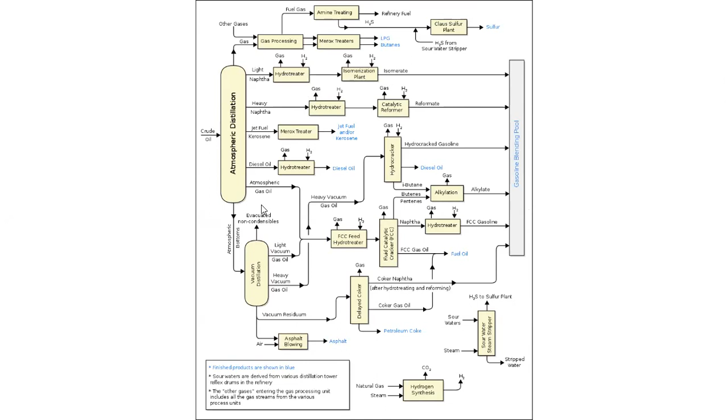Catalytic reformer - we will talk about the catalytic reformer, what is the function. And there is hydrotreater - is it hydrotreater? There will be one more function where you will have removing the sulfur, right? Removing sulfur is one of the things - desulfurization process. And finally you have alkylation, then you will go to the gas oil. This is the general overall flow chart of what is happening in your petroleum refinery. It has come from crude oil to the lighter one, refining process.

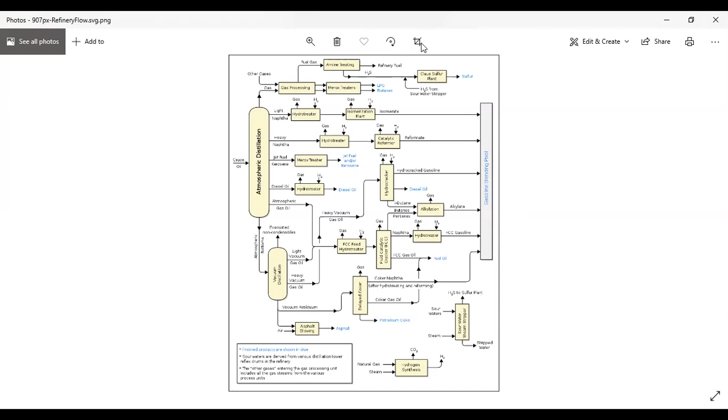I will send you this chart, you can go through that. And whether you will have a question on this or not, we will also see some sample questions - it's all repeatable questions. So you can prepare for that, or if you have already some material, please prepare for that also. Come back to the distillation tower.

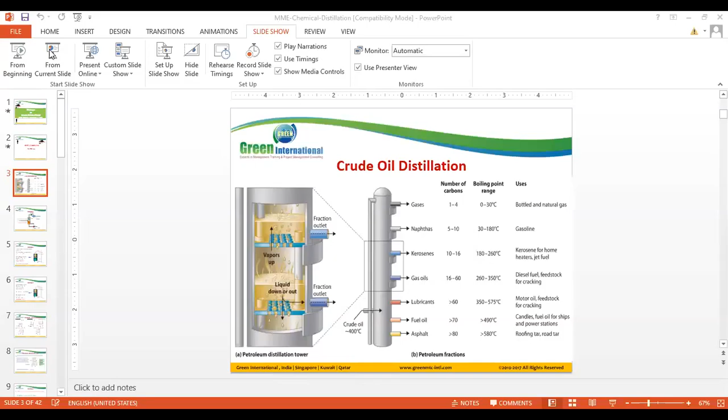Our feed, right? There are two sections generally, rectification and stripping. So rectification means whatever the lighter one will go, then they put in a condenser, have a reflux drum, then the distillate will be removed. Then the reflux will be fed back to the distillation column.

Similarly, stripping means you have a heavier one, which they put in a reboiler. Then whatever the boil-up, that will be fed up into the distillation column. Then you will get a bottom. This is a distillation tower process. You have two sections. One is rectification, another one is the stripping section. This is the reflux area, and this is the reboiling section.

So Madam, can you go back to your last slide? This one. Yeah. Why are we calling the above section rectification? Any reason? Why? Because here it is not only feed. I think whatever lighter gas in the boil-up, right? This is also further removed. Same way for stripping also.

Why is it called stripping? Removing the heavier one, like a liquid, they say vacuum distillate. That heavier one, like tar or asphalt, all are removed. So that will be stripped out. Here we are rectifying the lighter one, the gas. That's why this portion is called rectifying. This is called stripping. That's because of that. Okay.

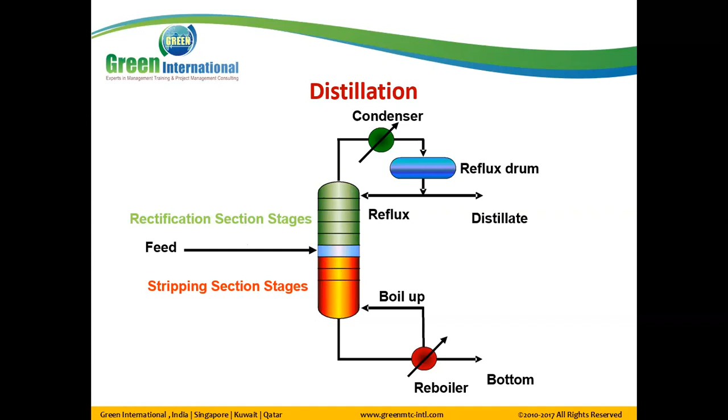All right. So again, we are taking the mass balance here because, as I told you, we are going to calculate the percentage of composition only. So for the feed, the major mass balance is F equal to D plus B. Then if I take one component in the feed, whatever component is in D, whatever component is in B, that's what will happen. Same way for your rectification section. This is your rectification section.

So here it is V bar. What is V bar? V bar will be the boil-up, whatever boil-up is coming in and going up, plus from the feed also the lighter one, because the distillation column will be maintained at atmospheric pressure and temperature. So it depends upon the temperature and the condition. So the boil-up and the feed will go here. That's why it is V bar. They're not calling it the same V.

So V bar is nothing but L, the liquid, which after condensation will be poured back to the distillation column, plus D. That's the rectification mass balance. Similarly for a component, if you take X, X in V bar is nothing but XL·L plus XD·D. Here they can calculate the reflux ratio, because this process is called reflux. Reflux ratio R is equal to L by D. That's called the reflux ratio.

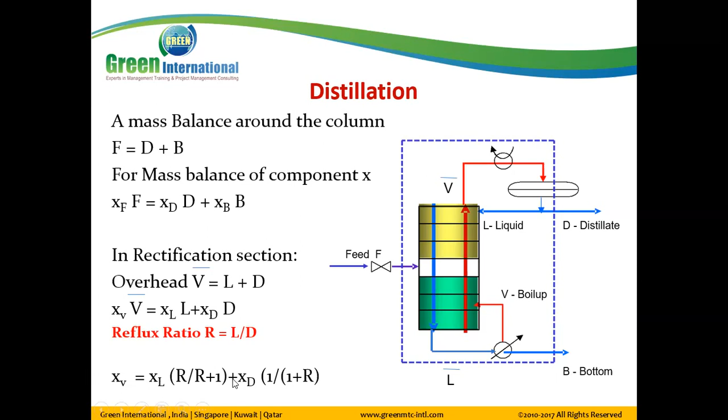So the mass balance can be written in terms of reflux ratio also. That means XV equal to XL into R by R plus 1, plus XD into 1 by R plus 1. Please remember this formula and the reflux ratio formula, because sometimes they'll give you the reflux ratio, then they may ask you to calculate some composition. So that is what you can calculate: XV, XL, XD. Same thing we saw here.

Now come back to the stripping section. The mass balance is L bar equal to V plus B. Here, L bar is V plus B. Same here, there is a boil-up ratio. Boil-up ratio means V by B. L by D is your reflux ratio.

Now, when we talk about the V bar, V bar is nothing but some coming from the feed and some coming from B. Put together, it's called V bar, right? But that depends upon the condition.

The liquid condition. So if the feed is a subcooled liquid, then L bar is greater than F plus L. There will be more condensation, more liquid formation in the distillation column. That's why they said L bar greater than F plus L, where L comes from the condensate, which is reflux from the rectification section.

If it is a bubble point, right? Bubble point means it started to slightly evaporate. So at bubble point, you have a V bar which has come from the reboiler. We can see even in the V bar, some liquid is getting condensed also. So in a bubble point condition, V equals V bar. Feed is completely liquid, L is also completely liquid. There is no feed vapor coming; from the reboiler in the stripping section, no extra vapor, so V equals V bar.

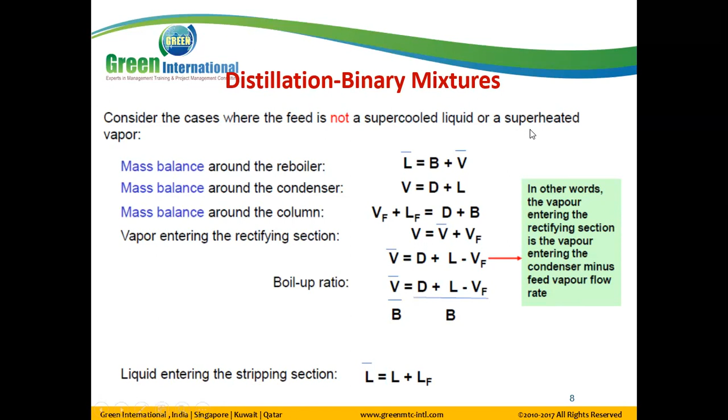And number of theoretical plates. This is given for your information, but so far in the exam, especially in the UPD exam, number of theoretical plates is not being asked. So just remember the formula, if at all it is being asked. See, mole fraction of more volatile component in the overhead and in the bottom, then this is the relative volatility. So they have to give you the relative volatility if they want to ask the number of theoretical plates.

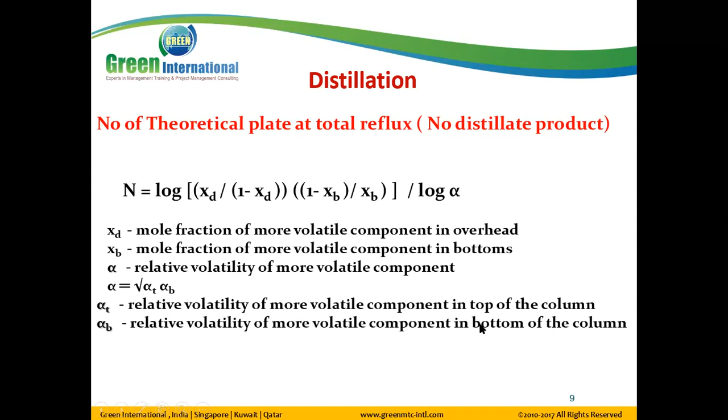Then you have alpha t, alpha b. Alpha t means volatile component in the top of the column. Volatility in the top of the column, volatility in the bottom of the column. This is a little bit going into the distillation process. There are some key, important things I'm explaining, because distillation itself is a big subject. Even petroleum refinery engineering is a separate 4-year engineering degree, right?

Okay. So there is one thing called K factor or characterization factor. What does it mean? Whatever the oil, they are giving it a grade, classifying it based on its paraffinic, naphthenic, intermediate or aromatic nature. K factor or characterization factor is a systematic way of classifying a crude oil according to its paraffinic, naphthenic, intermediate or aromatic nature. If the K factor is 12.5 or higher, it indicates the crude oil is predominantly paraffinic. 10 and lower means it's predominantly aromatic. This K factor is also referred to as the UOP factor or UOP K factor.

Why is this K factor important? If you are in oil trading, we are in the Middle East, country to country, because of the location or source, the oil grade is being given. If you check some kind of business magazine with different country oil prices, you can see they have put in one column the K factor. What does this K factor say? The paraffinic and aromatic nature. So normally 12.5 or higher is paraffinic and 10 or lower is aromatic.

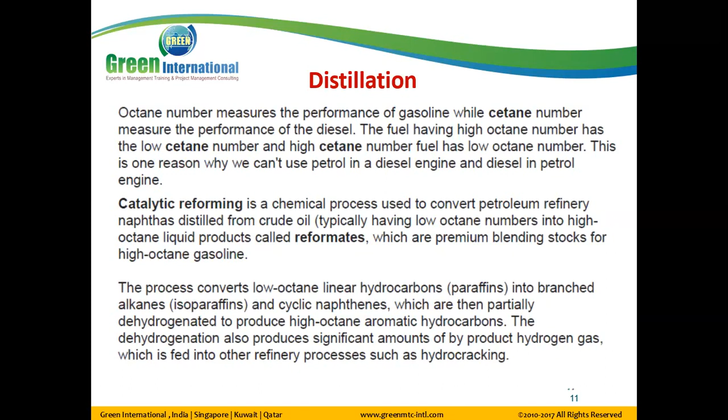That means normally in catalytic reforming, a partially dehydrogenated high octane aromatic hydrocarbon will be produced. This dehydrogenation also produces some hydrogen gas as a byproduct that will be used in hydrocracking. Hydrocracking means converting into lighter hydrocarbons. So this is the basic theory.

I have given whatever information I got. These types of questions are being asked. Anyhow, you can also find a lot of material available, but whatever material I have, I will send it to you regarding distillation. There are a lot of questions, mostly theoretical questions, like what catalyst, something like that. I will share that also with you. Please practice before the exam. Now we go for the distillation question.

A binary mixture of tetrahydrofuran and isopropyl alcohol is to be separated into relatively pure streams of THF and IPA. This mixture of THF and IPA we need to separate in a distillation column, which is operating at atmospheric pressure. The column material balance is summarized in the table below. For the stripping section, the L/V ratio is given as 1.4.

Vapor leaving the reboiler has a flow rate. What is the vapor flow rate in the reboiler? From the material balance, this is a repeated question in the exam, the EPD exam. The material balance is given and L/V is given, asking the vapor leaving the kettle reboiler. We have to do the balance actually, right?

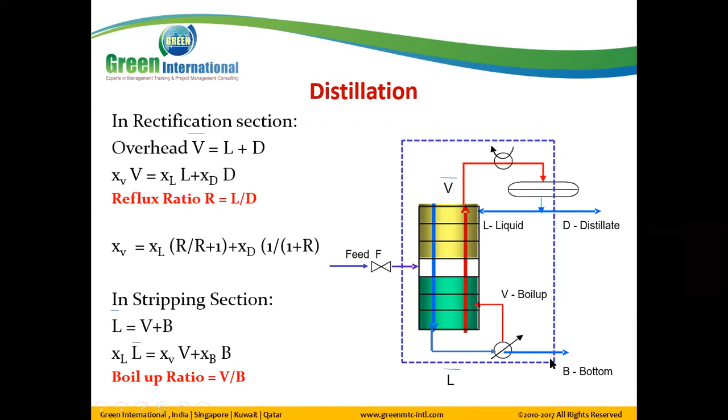In the reboiler section, L equals V plus B. How do we know? From the mass balance in the reboiler section, L = V + B. Then just divide the equation by V, because they have not given the boil-up directly, they have given L/V. So you convert the equation to L/V = 1 + B/V. B is the bottoms, V is the vapor.

So take the bottoms flow rate as 1.259 total, and B/V is given as 0.4. So V is 1.259 divided by 0.4. Can somebody check whether the answer is right? 1.259 is the bottoms total stream in lb-mole per hour, the molar flow rate is given. So divide by 0.4. The question seems big and they have given a table and everything, don't get confused, right?

They are talking about the kettle reboiler section. Take a mass balance and check the molar flow rates given: feed flow rate and feed composition, distillate flow rate and distillate composition, same way for bottoms. Here the L/V value is given as 1.4, so 1.4 minus 1 becomes 0.4. Then B/V equals 0.4, so V equals B divided by 0.4. So 1.259 divided by 0.4 should give 3.15.

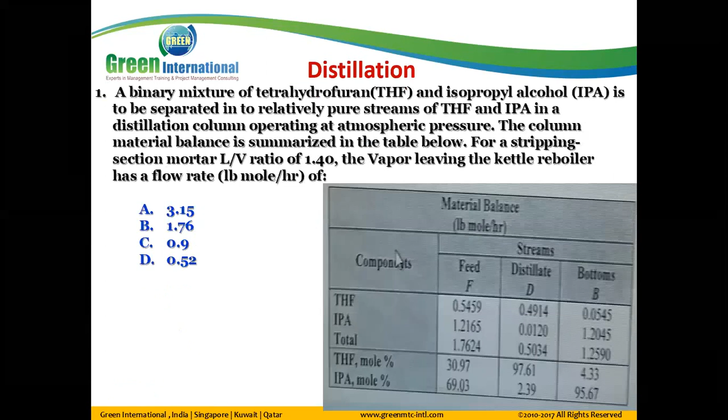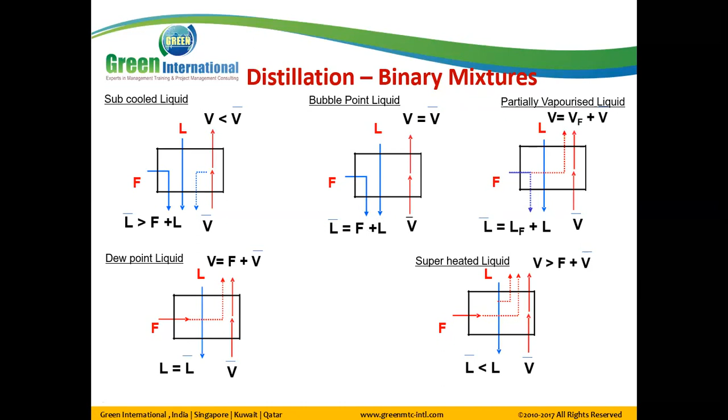Not even a reflux, you mean? Yeah, no reflux. They are only talking about the stripping column. The distillation column can be used only for stripping, right? So that is the stripping column they're talking about. Here it's a trayed stripping column. So if we are saying stripping column, then we should assume there is no reflux.

Exactly. If it is a normal atmospheric distillation, there will be a reflux and a rectification section which has the reflux, and we have a bottom reboiler section, right? But here the distillation is only stripping. So there is no reflux section here. Whatever liquid is coming is only from the feed. That's why L equal to 0.

When L equals 0, then L bar equals F only. So with L bar equal to F, you can write it in mole fractions: X_F F equals X_V V plus X_B B, right? Then you divide it by B. Why do I have to divide by B? Because I need to calculate V by B. So I need a relation between F by B and V by B. Only then can I calculate, right? For that purpose, we divide by B.

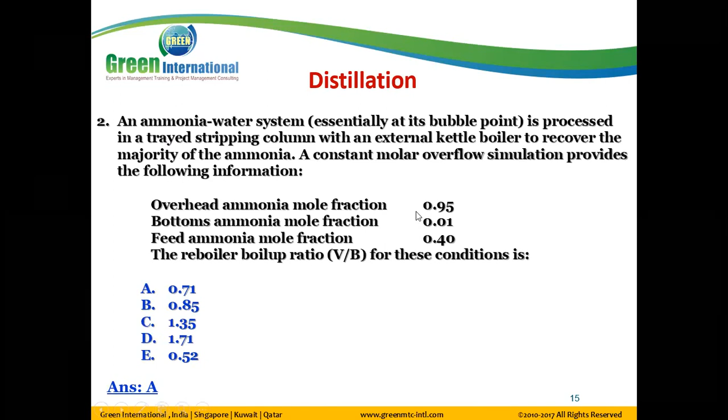Then you write the same equation for ammonia, and substitute for water also. When you solve, you will get F by B equal to something. Then you put it in the other equation and solve for V by B equal to 0.71. The question seems simple, but in the calculation there is a bit of substitution. If you get this ammonia-water stripping column question in the exam and the molar values are not changed, you can take the answer. Otherwise, if they changed the mole fractions, just remember this is the way: for ammonia you solve one, for water you get one molar balance equation, then quickly substitute and get the value.

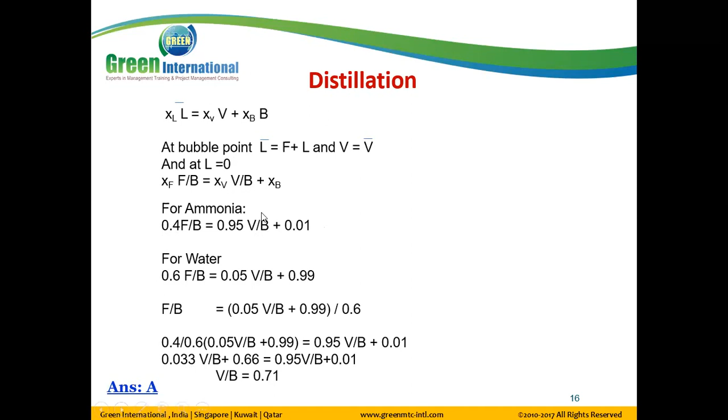The rest are going to be theoretical questions. Bottom product of atmospheric pressure crude oil distillation column. Right, that's the key thing. There are two distillation columns I showed you in the chart. People will generally say asphalt, but asphalt will be the bottom product of vacuum distillation. The first distillation is atmospheric distillation.

Then whatever you get is called reduced crude, right? In atmospheric distillation, the bottom product, which you can call reduced crude, goes to the vacuum distillation. In vacuum distillation, the bottom product is the residuum, vacuum residuum, and next to residuum it's going to be asphalt. But here they're talking about the bottom product of atmospheric pressure crude oil distillation. The bottom product is called reduced crude.

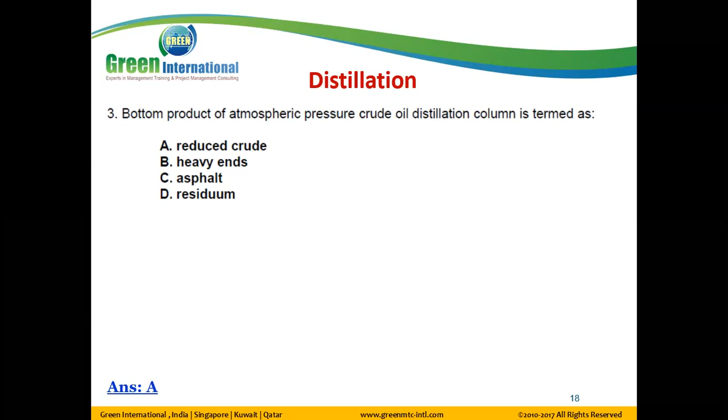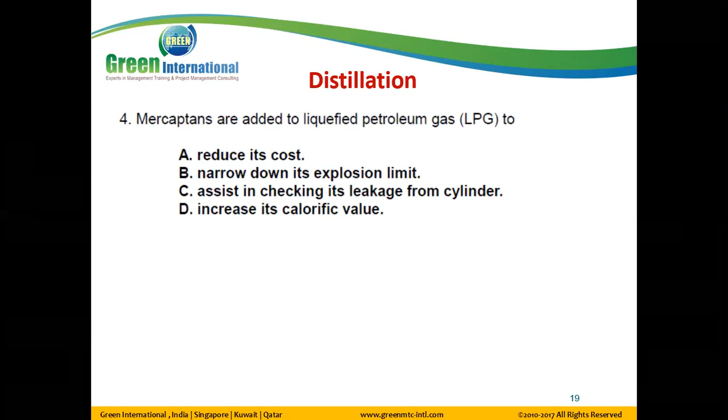Mercaptans are added to LPG. Why? This is also a very commonly asked question. We are adding mercaptans in LPG gas, what is the reason for that? Yeah, it's mainly for leakage. Exactly, for smell indication, to assist in checking leakage from the cylinder. C is the right answer.

Crude topping column operates at atmospheric pressure. When it is topping, it's atmospheric, exactly atmospheric pressure.

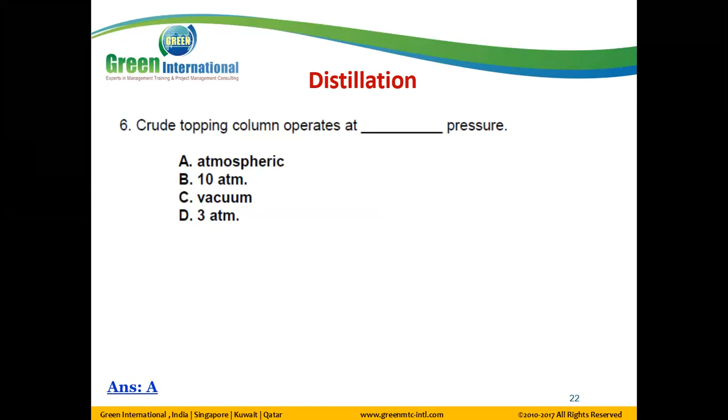These are the questions. Some theoretical questions are possible in the distillation chapter also, because the process calculation, we are mostly doing calculation. So if they cover the calculation in material balance, then in distillation they go with some theoretical question.

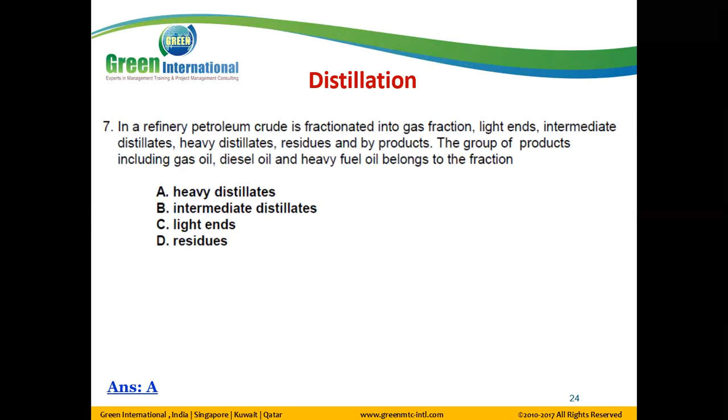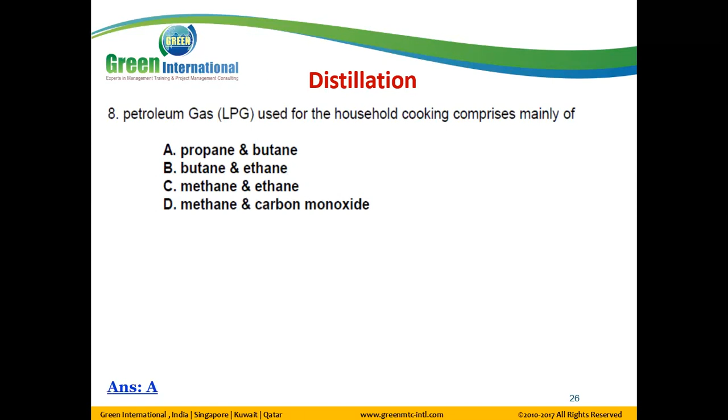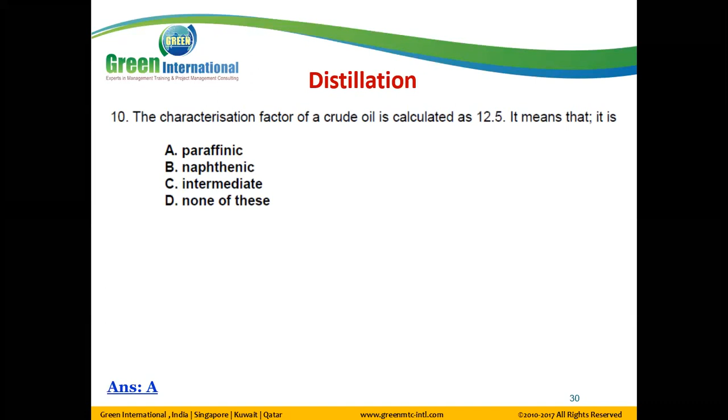Question number 10. Paraffinic, yeah? Paraffinic, right, it's paraffinic. About 12 means paraffinic, 10 and below means aromatic. Aromatic, yeah.

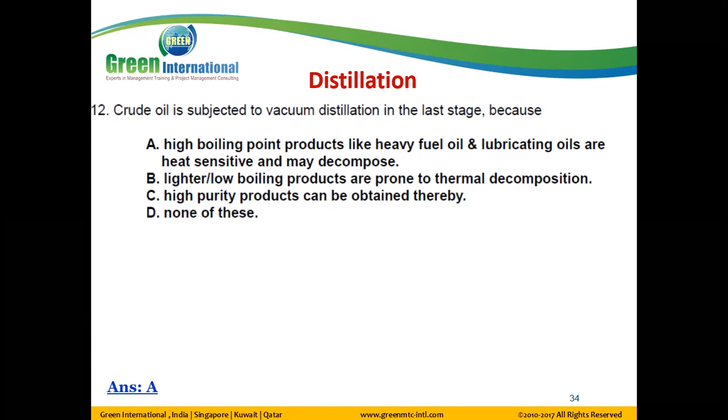Question number 12. Crude oil is subjected to vacuum distillation in the last stage. Why? Because we have atmospheric distillation, then only vacuum distillation, right? Why is vacuum distillation not in the first stage? Why is it in the last stage? It seems like A makes sense. Yeah, because heavy fuel oil, lubricating oil in vacuum distillation starts to decompose. That's why we maintain atmospheric distillation, separate it out, then go to vacuum distillation.

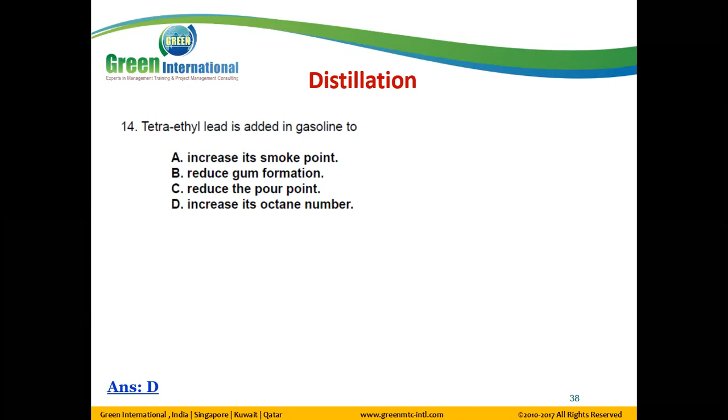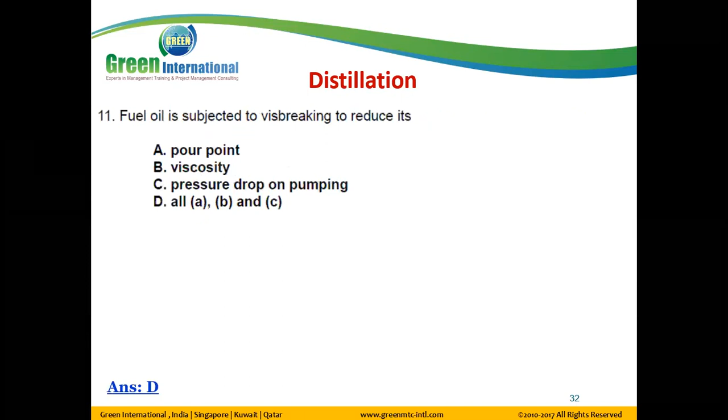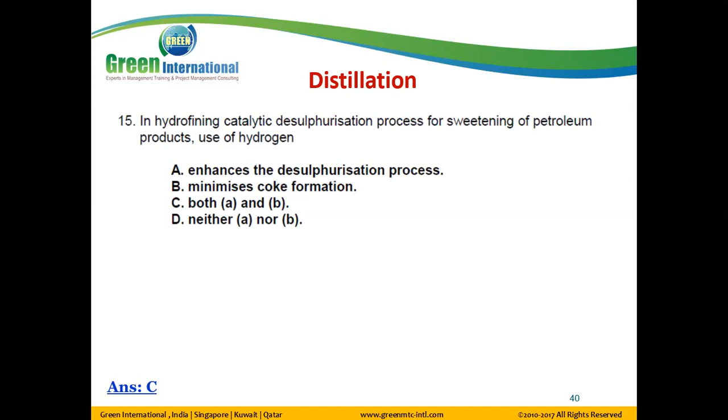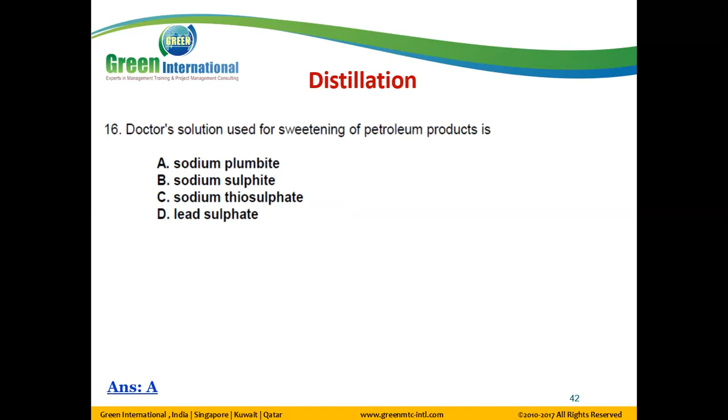Sweetening means removing the sulfur, and hydrogen is added in the desulfurization or sweetening process to enhance the process and also minimize coke. And the solution used, doctor solution, is nothing but sodium plumbite. So these are some theoretical questions and some calculation-based questions.

Generally the V by L ratio, the ammonia water system is being asked, then some theoretical questions. I have a collection of petroleum refinery process questions in MCQ that I will send you. Please prepare that also if you have more questions now, because mostly all are theoretical - if you just go through and remember the options, it will be okay.

Now, any question here? If not, I will go to the next chapter, which is fluid mechanics. What do we have any additional process?

I mean material balance - you said you will share with us for the distillation. For distillation, I will send the question only, not maybe the chart which I showed you initially. That chart and the question I will share for petroleum, for distillation. Questions without answers? You mean you have to work them out? No, with answer - step-by-step answers or only the direct answer?

Generally no calculation questions, all are theoretical questions. Just now we saw what is the sweetening process, the desulfurization process, that kind of different process question.

No, I mean one like that has the reflux ratio and boil-up ratio - do we have any for calculation as well? No, so far what I have, the information is only 2-3 questions. That's it, whatever calculation questions in distillation I have already given. But now we have solved only one. You mean you will give it later?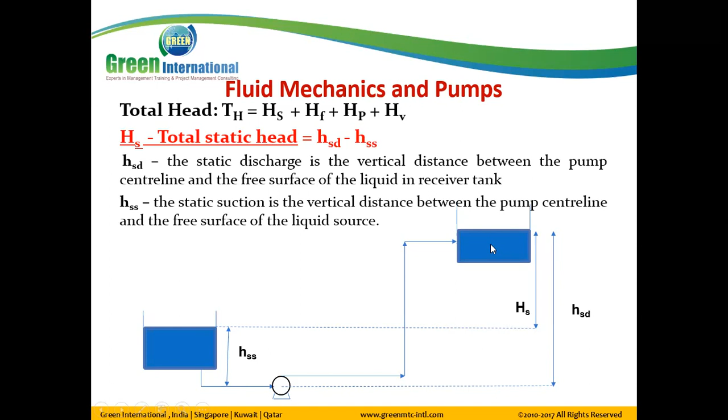So here HSS is measured from the centerline of the pump to the level of water — that's HSS. And this is HSD. So the difference is HS, the total static head. So total static head can be calculated from the information given by HSD and HSS.

Next is the friction head — same idea, friction at discharge and friction at the suction side. The formula here is HF equals F L V squared by 2 G D. If the friction factor information is not given, you can ignore the friction factor — that's from an exam perspective. But in real practice, you would get the factor value and use it. So HF equals F L V squared divided by 2 G D.

Say friction factor, which is nothing but roughness factor. D is the diameter, Reynolds number, 0.9 to the power of this formula, right? You can substitute and you can calculate the friction factor, but you should know the diameter. Reynolds number also you can calculate. The K value, the roughness factor, should come from your material or the supplier. They can guide you to give you the roughness factor. So get all these values, you can substitute. But in exam perspective, if further information is not given, then you can ignore the HF.

Okay? So this is a gravitational constant. Generally instead of K, they will tell you the loss coefficient, right, which is nothing but FL divided by D. F is the friction factor, D is the diameter, L is the length. So they may give you the K loss coefficient value. From that also you can calculate F. So if friction information is given, either FLV squared by 2GD, F from this formula or from this formula. They will give a loss coefficient. Then from there you can calculate F and substitute here in the friction head.

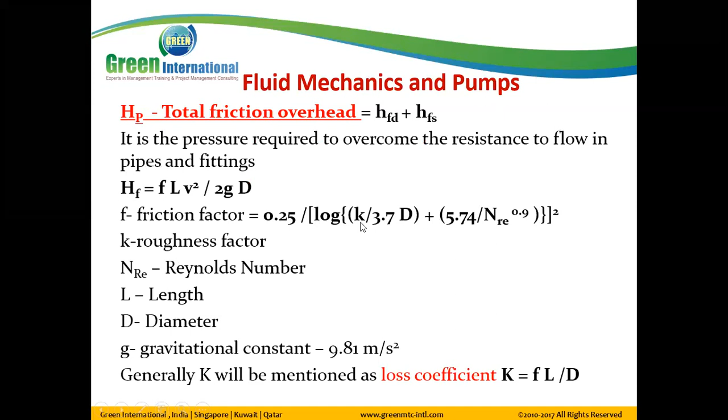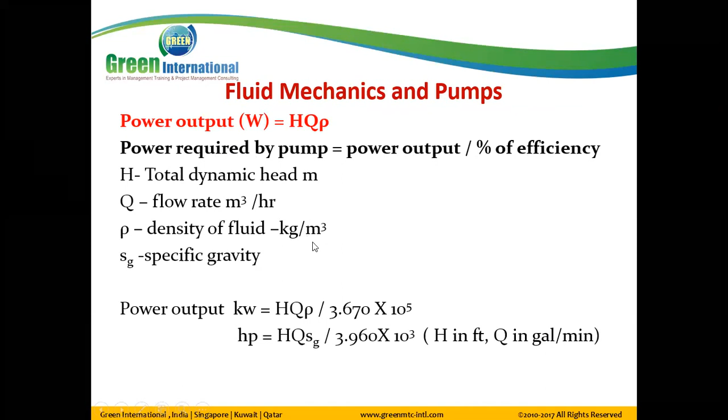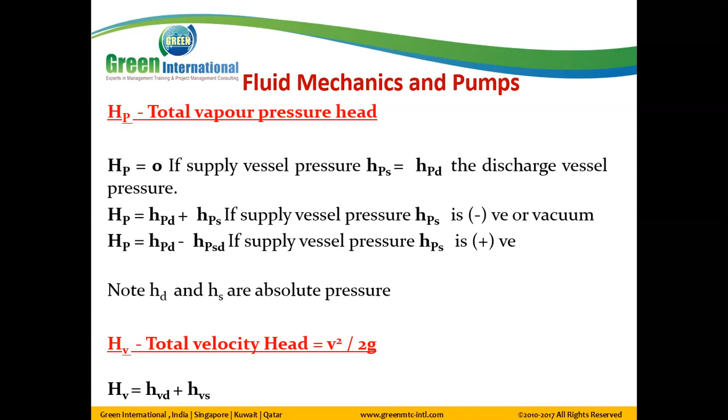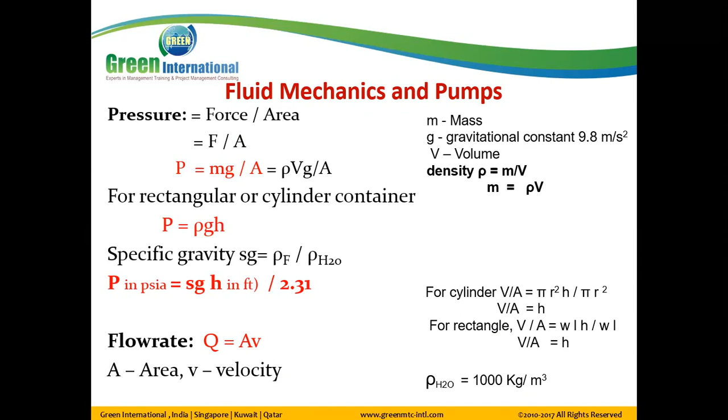How about here? Everything is head, H, but here also minus P. Here also we have to calculate, right, to convert pressure to head? Yes, but at the end we are unifying the units by head, which is meter. How do you get the formula? Pressure equals SG times H divided by 2.31. I understand that; if I know the vapor pressure, I can calculate the H. Can we go back to the formula?

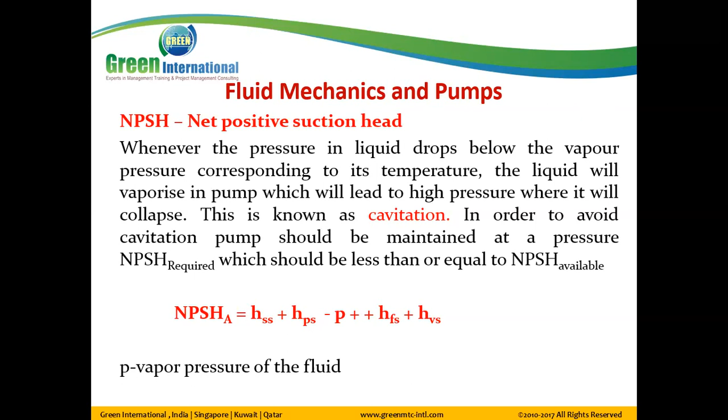So this is HP, not P. P alone, because it is written down here: P is the vapor pressure of the fluid. I take it as one formula, because if I write the conversion using SG times H divided by 2.31 here, people will be confused. The P here is a pressure, but you convert it to equivalent head; only then can you get the NPSH. One value cannot be in a pressure unit and the other in feet, or you can't get the net suction head. We will see sample example questions later and you will understand. Okay, first question.